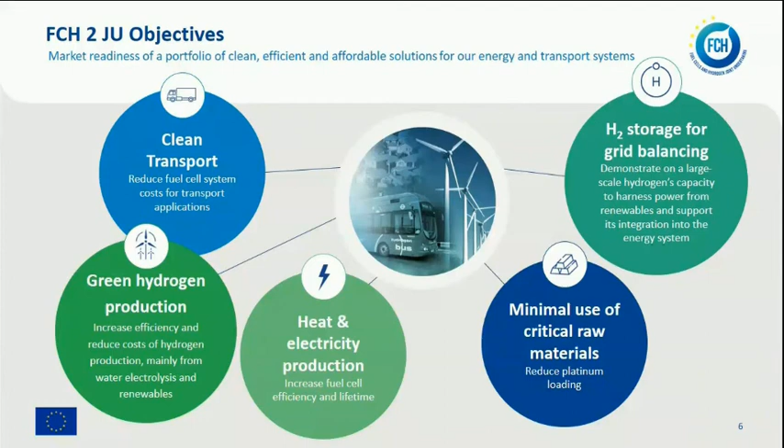Aligned with the 5 objectives, we have our program structure. And when we talk again energy, remember the 3 objectives. We work on our projects on hydrogen production and distribution, storage for renewable energy integration, and fuel cells for power and combined heat and power generation.

On the transport, we address all road vehicles, cars, buses, trucks. Non-road vehicles and machinery, like materials handling vehicles, for example. Maritime, rail, and aviation applications, more heavy-duty applications, and again, you will see it in the call of this year, but also the related fueling infrastructure, the hydrogen fueling stations with all their components.

And when we talk about cross-cutting, these are issues that we address for both energy and transport applications, like standards, pre-normative research for standards, safety, education, and all the issues that are common to both policies, energy and transportation.

So far, I mentioned 13 calls, so we have 11 years of existence and 11 years of implementing calls. And between 2008 and 2019, we have supported already 266 projects for about €1 billion public funding. And then you can see down, it was covered somehow by the articles, we have at least the same amount of private funding in projects. So these are in the projects.

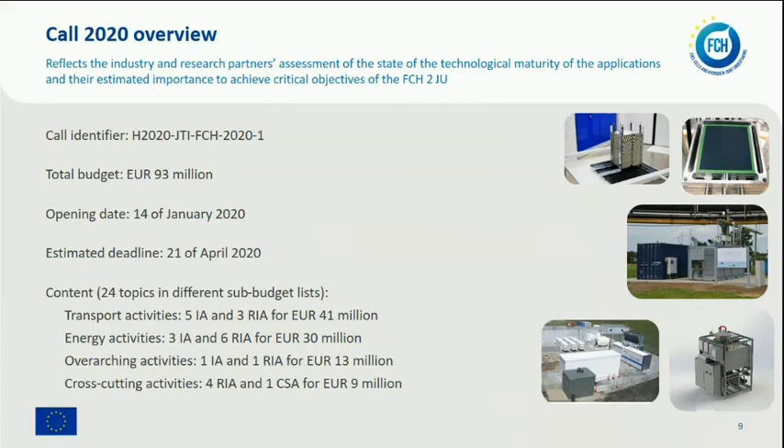I'm not going to talk much about Mission Innovation, just to mention that it was launched in May 2018. Innovation Challenge 8, hydrogen, is the challenge that is important to us, and the member countries in that challenge are encouraged to participate in our call.

Now, practicalities. You should have already the agenda. The agenda was on our website. We will go through the call topic presentation. Some of the topics will go through the call topics presentation. We are not going to read out our work program. So we will underline important things in every single topic. Please put questions if you have.

I'm going to get in a moment to the call. We will have a networking coffee. Please use this break for coffee, for lunch, and even in the afternoon to talk to each other, form consortia, and in order to submit successful proposals to us.

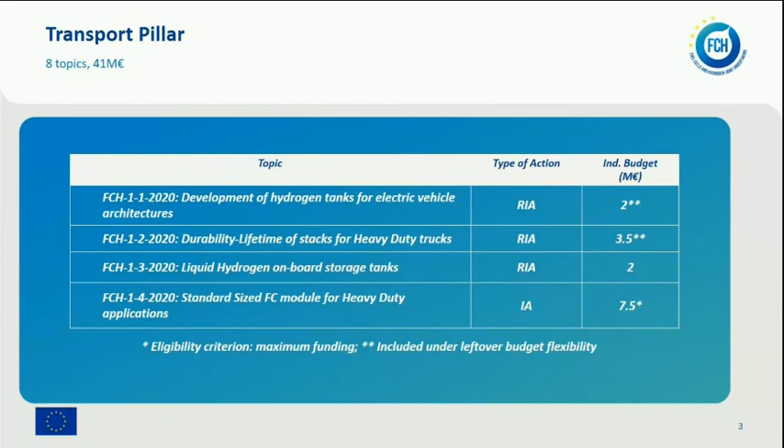The first topic is on hydrogen tanks for electric vehicle architecture that have a low TRL, and I'll show you very briefly. The second one is durability of stacks, again, kind of a low TRL type of topic, for advanced units for heavy-duty applications. Then we have liquid hydrogen for onboard storage, and we have standardized fuel cell modules for heavy-duty applications. Very challenging but very interesting topic as well.

The next four are demonstration of coach buses. This one is one of the big ones, probably in Europe. Demonstration of liquid hydrogen for the waterborne sector. So this is basically marrying, if you like, the heavy-duty application of maritime ships and liquid hydrogen in one topic alone in Europe. So that's a big one as well.

Then we have a topic that's a little bit broad for train applications. There are a number of different applications that you could actually look at in terms of the railway sector. And that's a big one, 10 million euros overall. And the last one is scale-up and demonstration of innovative compression technology. So that's, let's say, moving up to scale in terms of TRL for new compressor technology.

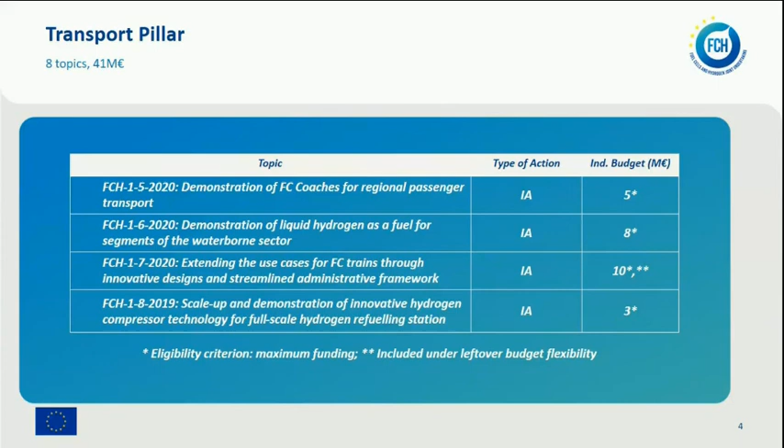So without further ado, I'm going to try to summarize very briefly the main lines of each one of these topics. So the first one I mentioned is development of hydrogen tanks for electric vehicle architectures. And the idea here is that the vehicles don't really match the cylinder shape that we have today, and we need to go to conformable shapes, more prismatic type things, that will really conform much better to standard vehicle architectures. Okay? So that's the main thing.

This is, of course, a low TRL. There's a lot of work that needs to be done, not just the materials, but really even beyond that. And you have some requirements in terms of the design space that you need to fit into, how many prototypes need to be built, and there's a fair amount of testing listed on the topic that you need to go through for any one of these prototypes. So that's something that you need to pay attention to. And I would also underline this is a Mission Innovation labeled topic. So please look into possibilities to collaborate with such countries.

The next topic is durability and lifetime of stacks for heavy-duty applications. And the idea here is to see if you can come up with a set of stacks and/or cells and MEAs, and truly determine what the degradation mechanisms are, and improve the MEA and cell design based on those findings, particularly for heavy-duty applications, more specifically for heavy-duty trucks.

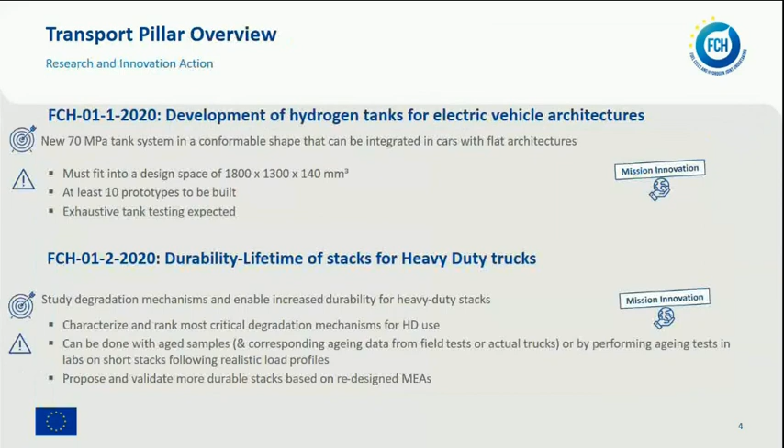The next topic is liquid hydrogen for onboard storage. And here the idea is to go to liquid hydrogen for onboard storage for heavy-duty vehicles. So this is not necessarily light-duty vehicles, which was something that was done in the past, and you may remember some work done 10, 15 years ago by a number of companies. This is really going in the next direction for larger storage requirements for heavy-duty vehicles.

It needs to be compatible with existing liquid hydrogen refueling technology, and the feasibility should be evaluated through a design study and demonstration test bench. So that's something that you also need to look at. You have there some targets in terms of the capacity. So these are larger tanks, 40 to 100 kilos. So this is not for your standard light-duty vehicle, your car, or anything like this. This is really trucks, or even larger, trains, ships, and so on. And with some targets also in terms of the boil-off rate and the refueling rates.

So that's an interesting topic. The next one is standardized fuel cell module for heavy-duty applications. This is a very interesting and challenging topic at the same time. The idea here is to develop and validate a standard fuel cell module for heavy-duty applications. The first 12 months should define the standard module frame, size, inputs and outputs, connections, and so on and so forth, by a minimum of 7 fuel cell suppliers and 3 vehicle OEMs.

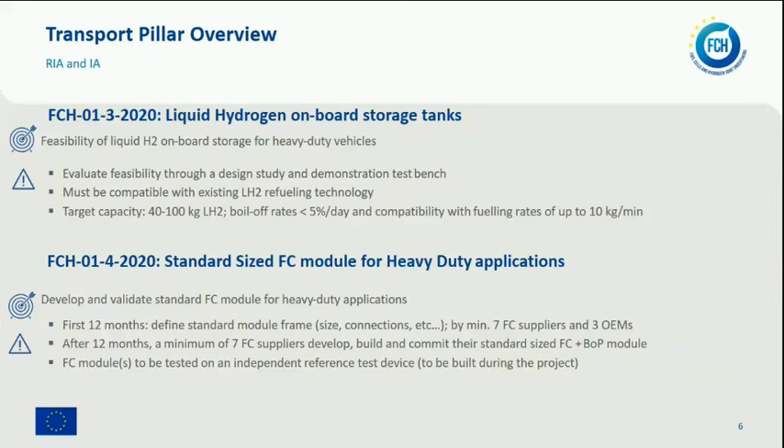Today's topic is demonstration of fuel cell coach buses. This has been requested by the industry increasingly over the last couple of years or so. These buses need to be designed and built; a minimum of 6 of them should be built and demonstrated within the scope of the project in 2 coach segments, both intercity and long distance. They must be operated a minimum of 2 years and 80,000 kilometers per coach per year, with a minimum daily travel distance of 100 kilometers. So this is the first time this is done. We hope to see a lot of interest on this one.

And then the next topic is demonstration of liquid hydrogen as fuel for the waterborne sector. And again, you can imagine that ships, especially larger ships, require storage technologies that go a little bit beyond standard compressed technology, and there liquid hydrogen starts to become a more attractive solution. So this liquid hydrogen storage module needs to be developed with a minimum of 1.5 tons of capacity, and of course integrated into the ship with a minimum of 2 megawatts of power.

Bunkering and scalability up to 20 megawatts also needs to be addressed in this topic, and this should be operated. So it's not just a design, they need to be integrated and operated for a minimum of 12 months, including both winter and summer seasons, with a minimum of 3,000 operational hours.

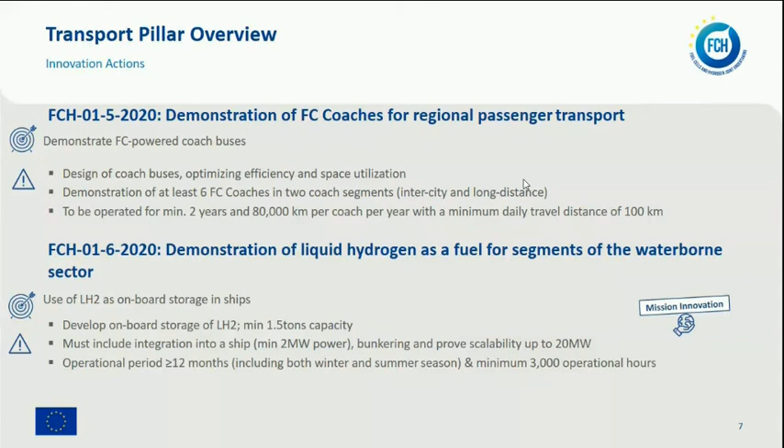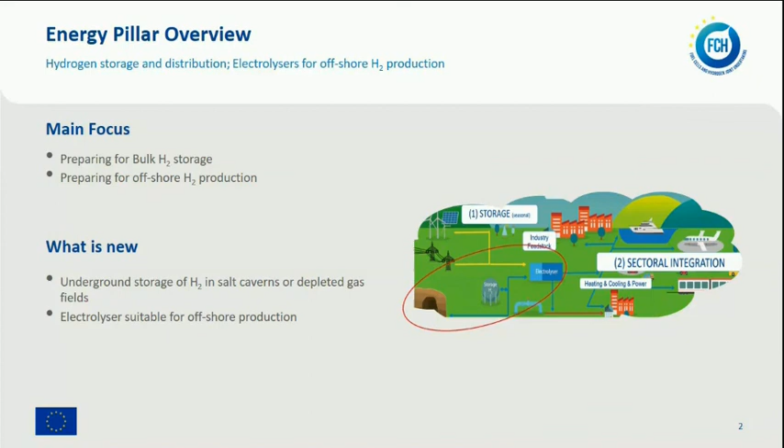Four topics. 2.1 is for hydrogen distribution: liquid organic hydrogen carriers, a low TRL, 2 to 4 TRL topic. 2.5 is the underground storage of renewable hydrogen in depleted gas fields and other geological storage, oil fields. It's a study. 2.6 is the electrolyzer for offshore production of renewable hydrogen. These are all research projects. And the last topic, 2.7, is the cycle testing of renewable hydrogen in a salt cavern, a small salt cavern.

It's a demonstration project. Here topics 2.5, 2.6 and 2.7 have this limitation on maximum funding, and two topics, 2.5 and 2.6, are included under leftover budget flexibility, meaning they would be preferred in case there is additional budget left. These would be preferred topics to select more than one proposal. So, briefly through the topics.

2.1 is catalyst development for improved economic viability of liquid organic hydrogen carriers, decreasing PGM loading. It's open to all concepts, provided the carrier addresses the efficiency, regulatory and safety issues. And what is important for me to clarify, as it is not very clear in the topic text: the capacity of the rig to be demonstrated is mentioned as 10 kilowatts. This refers to the dehydrogenator power. It's roughly a system processing 1 kilogram of hydrogen per hour. These systems now consume around 10 kilowatt hours per kilogram of hydrogen released. The aim is to take this down to 6 kilowatt hours per kilogram.

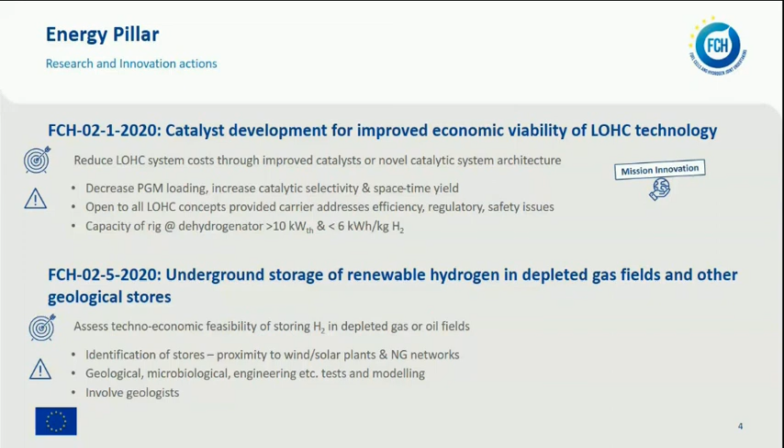2.6, the research is the electrolyzer module for offshore production of renewable hydrogen. It will be a 1 megawatt plus electrolyzer compatible with an offshore environment. To save some time, we didn't dictate that it goes offshore. It should be near shore and use all the funding to improve the electrolyzer. It should be one module of the multi-module design that at the end of the project should be certified for offshore operation. The offshore operation should be fully simulated.

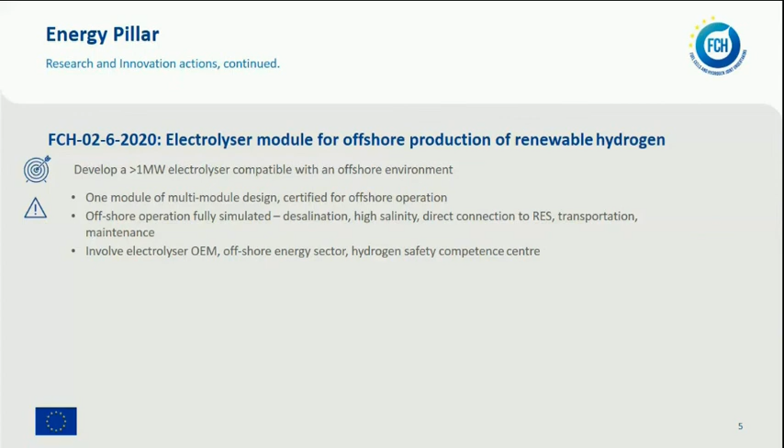So the desalination unit for feeding the electrolyzer should be there, and the system should be ready to work in a high salinity environment, direct connection to renewables, hydrogen delivery at suitable pressures, and ease of transportation and maintenance of this module to an offshore platform. It should involve an electrolyzer OEM, an offshore energy sector company, and the Hydrogen Safety Competence Center to be able to reach all these targets. The innovation action here is the cycle testing of renewable hydrogen storage in a small salt cavern.

Now, again, it's a megawatt scale electrolyzer to be coupled with an existing or to be drilled small salt cavern. And the capacity of the salt cavern should be small enough to allow daily cycling of the cavern. So it shouldn't be something very big, because a megawatt scale electrolyzer won't be able to produce enough hydrogen over a day to allow the cycling.

That will eventually allow, again, the technical assessment of geological, microbiological, etc. capabilities of salt caverns. Issues like the purity of hydrogen, injection and extraction should be addressed, in view of scaling up eventually to large capacities.

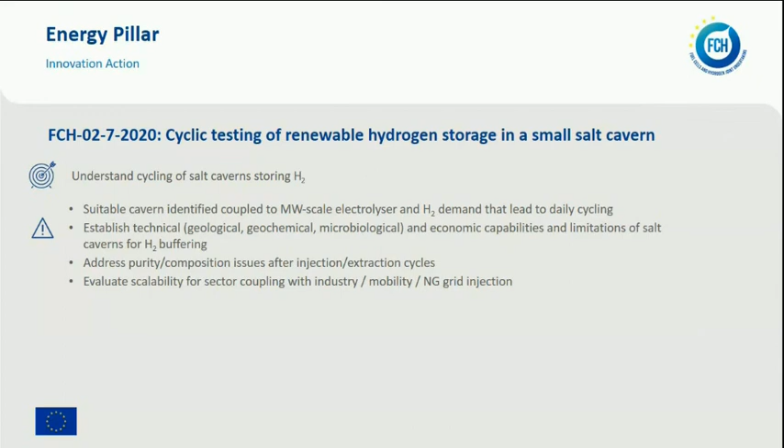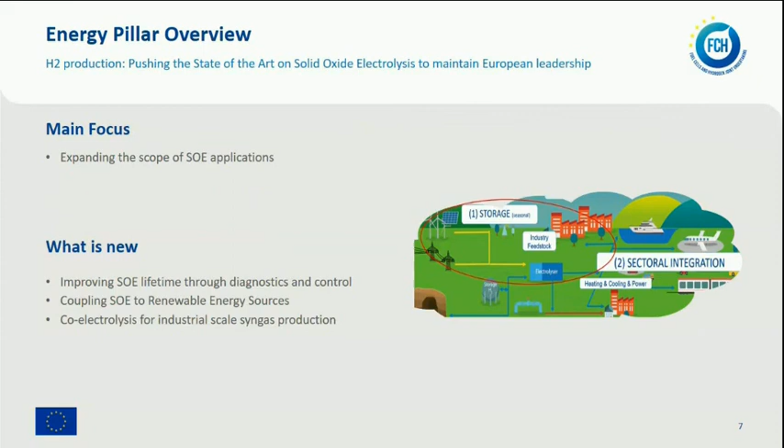The next subgroup, which is actually covered by my colleague Jens, is high temperature electrolyzers, mainly expanding the scope of solid oxide electrolyzer applications by diagnostics and control systems, coupling solid oxide electrolyzers to renewable energy sources, rather challenging things, and co-electrolysis. There are 3 topics. 2.2 is the integration of renewable heat and power, 2.3 diagnostics and control, and 2.8 is a demonstration of large-scale co-electrolysis for industrial power-to-X market.

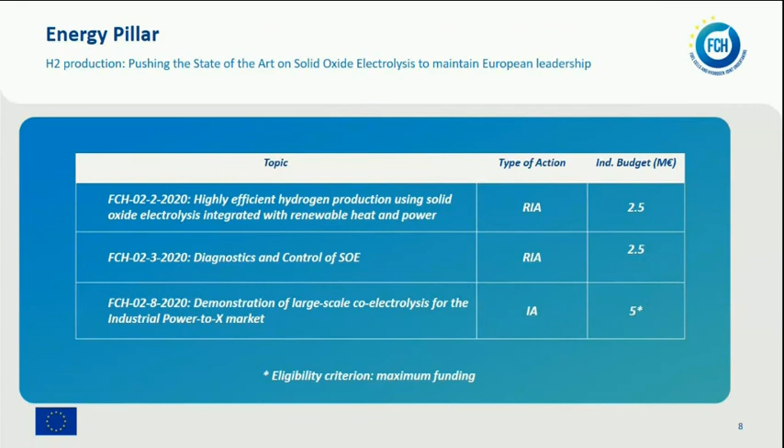2.2 is integration with renewables, the coupling with renewable electricity and heat. It's mostly coupling to solar energy, so PV and concentrated solar heaters. A capacity of 20 kilowatts electric is the aim capacity of the electrolyzer, and the effect of heat and electricity variation over the day. So the challenge here is how to keep the stack hot during the night. And eventually there will be a design study for upscaling to hundreds of megawatts.

Topic 2.3, diagnostics and control for solid oxide electrolyzers, is going to build up on what has been done for solid oxide fuel cells, to understand better degradation mechanisms for solid oxide electrolyzers, reversible solid oxide cells, and co-electrolysis.

Lastly, the demonstration project. We do have demonstration of large-scale solid oxide electrolyzers now at the scale of 3 megawatts equivalent electric. Now the point is to move to megawatts for co-electrolysis, aiming for a system of 700 kilowatts electric, capable of producing at least 80 kilograms of syngas per hour. It should be fully equipped, the CO2 stream should be available, the electricity supply, etc. Demonstrating the system for 2 years, producing 500 to 900 tons of syngas over that period.

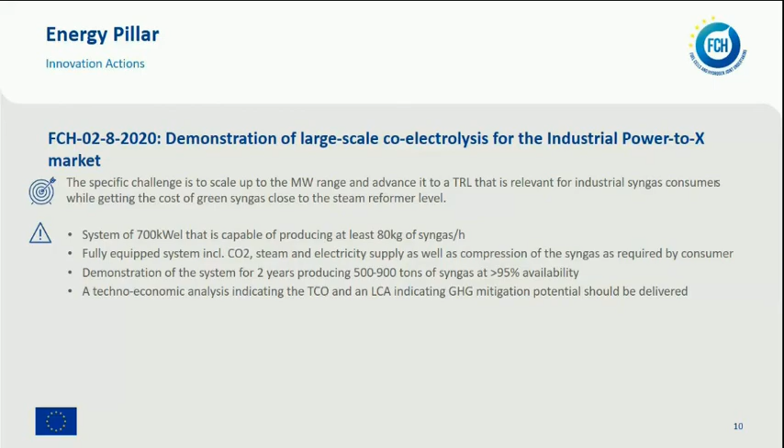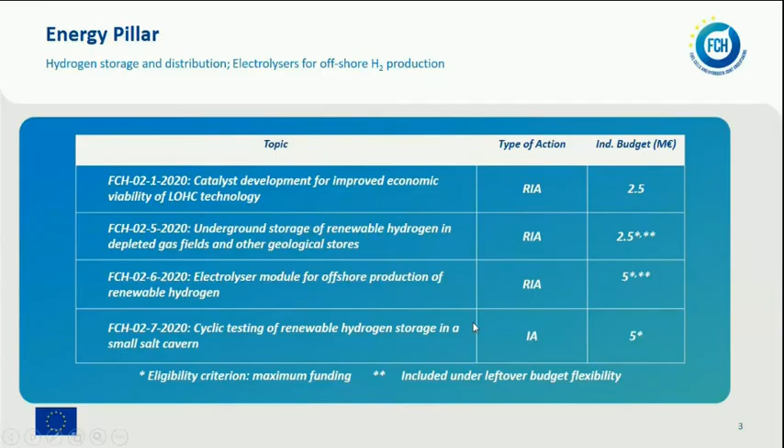Can you go to slide number 12? So, with that I've done with the slide.

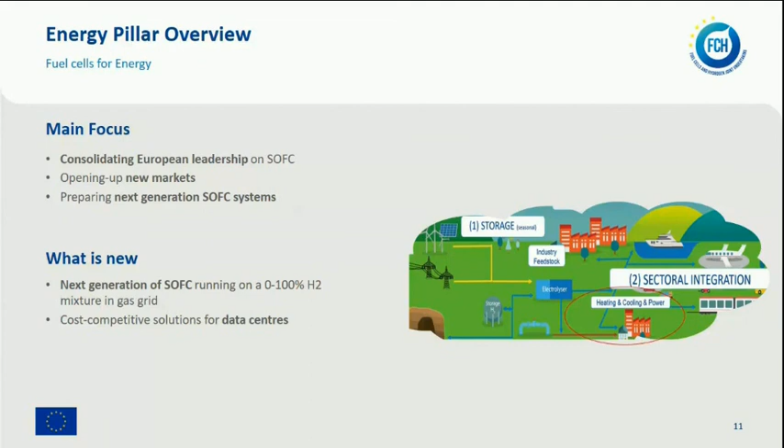So again, here, data centers, innovation action, and next generation of solid oxide fuel cells, all to help our industry to consolidate their position in the market. Two topics, the first one, research and innovation action. The second one on the data center is innovation action, and it has a maximum funding. That's an eligibility criteria, important to take into account.

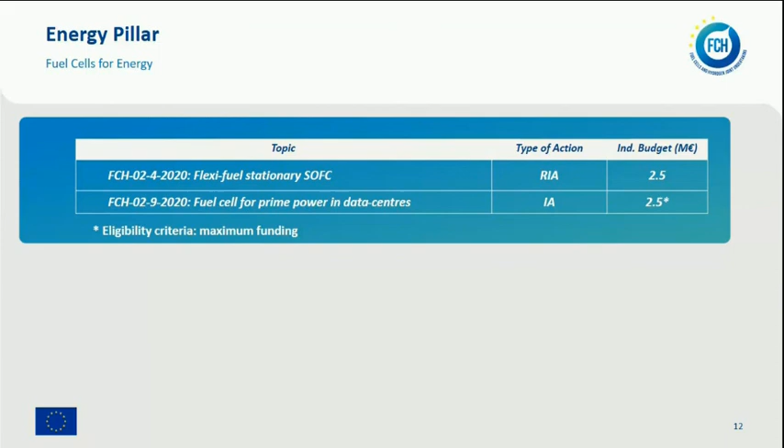A bit more details on the flexible fuel and stationary solid oxide fuel cell. It's about developing and demonstrating in a relevant environment stationary solid oxide fuel cell systems able to operate in a wide range of gas compositions, including hydrogen mixtures. That's why I was saying we really want, as a result of this topic, solid oxide fuel cell systems that are hydrogen ready. We need to look at what we have, so it's really focused on adaptation of existing systems. And two of the manufacturers should be based in the EU or associated countries under Horizon 2020.

We want to use these topics to bring the systems as close as possible to certification, so that the manufacturers have an offer in the market. And it has to be demonstrated in the operation window from 0 to 100% hydrogen. Two main things about the demonstrations. 6,000 hours at the stack level, showing a degradation rate below 1% per 1,000 hours. At system level, we need to see the system running, showing electrical efficiencies of more than 48%, with acceptable availabilities, more than 90%.

There are a number of system performance and CapEx targets, quite demanding, but that's precisely what we need to do on the performances and CapEx today with the units that we have. And they are all in relation to the 2024 multi-annual work program targets. As I said, the topic should lead to systems that are hydrogen ready.

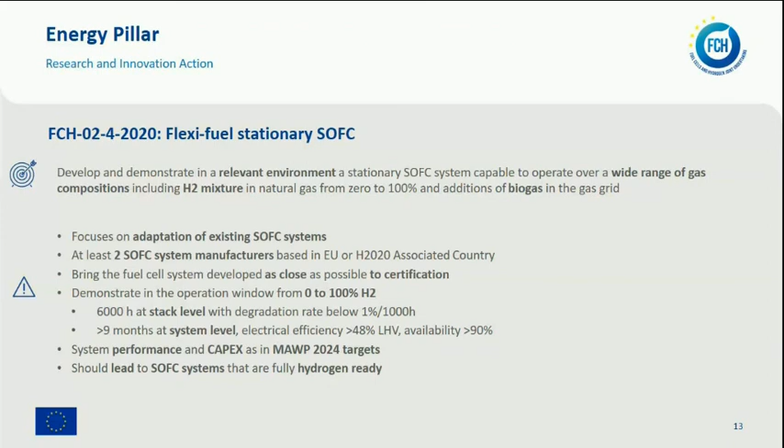On data centers, the challenge is how to provide reliable power supply to data centers in urban areas. Many times we have power cables that are overloaded. And when we go into thinking about, okay, let's do some sort of gas engine capacity, there are more and more air quality restrictions. There is a potential for fuel cells in there. So this topic is aiming to support industry to develop building-integrated solutions, fuel cells, adapted to data centers in urban areas. We're looking at more than 50 kilowatts electrical capacity for the fuel cells.

And we need to really have some solutions that position players in those topics in advance of what we have now available in the market. So it's very important to put together cost-effective concepts and high-performance solutions, and there are specific KPIs that you can find in detail in the topic. And the other thing here is that it's about strengthening the competitiveness of our industry. So the topic has to foster replication.

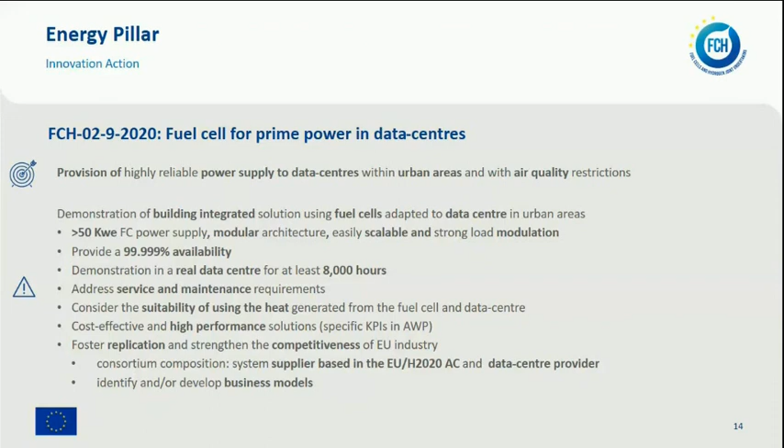Moving to cross-cutting, it's about cross-sectorial energy and transport addressing the same topics. We have a research action, looking at proton-conducting ceramic materials, and another one, an innovation action, flagship projects using hydrogen for decarbonizing islands. High-temperature proton-conducting materials: it's about unlocking the potential of proton-conducting ceramic materials as alternative ways to compress and purify hydrogen, a low TRL action, starting at 2, ending at 4.

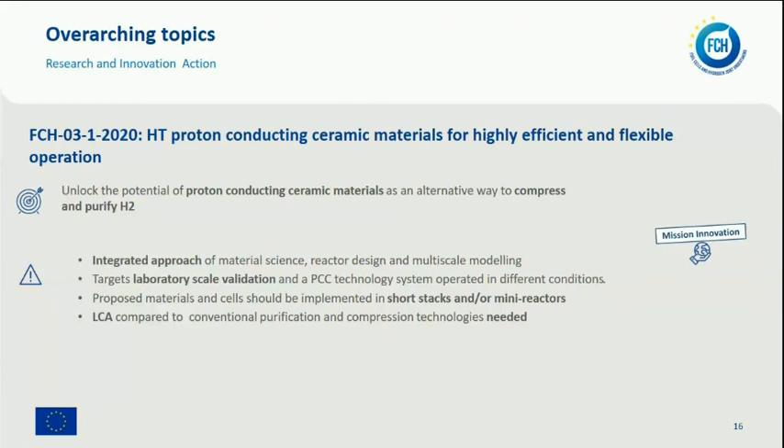An integrated approach is necessary to material science and reactor design. It targets the development, scale-up and validation under different conditions, and there needs to be implementation of the selected materials as short-stacks or mini-reactors. Life cycle analysis is needed in comparison with the conventional technologies.

Final topic I'm going to present, as I mentioned, a flagship project, 10 million euro maximum funding. It's about showcasing the ability of hydrogen to decarbonize islands in Europe. It's about demonstrating how hydrogen can enable sector coupling and maximize the amount of renewables that can be integrated in the selected island. All hydrogen has to be produced using renewables in the island, an important element.

At least 2 fuel cell and hydrogen applications covering energy and transport, where we have stationary fuel cells for heat and power to cover energy, and then to have some buses. At least 300 tons of hydrogen per year, produced in the island, using renewables in the island, but consumed also in the island. Key is the replicability and scalability of the project. Very important to configure revenues that are affecting that.

And of course, we set a maximum contribution, but the project has to identify and secure additional funding. It has to be a flagship project in a visible location, so it's up to the proposers to convince that this is the case. So any additional funding that is necessary needs to be covered by offering a financing scheme. And finally, it's all about the long-term vision for that island or territory. It's about how hydrogen can play a role in the local and regional plans, and it's important that that is also included and addressed in the proposals.

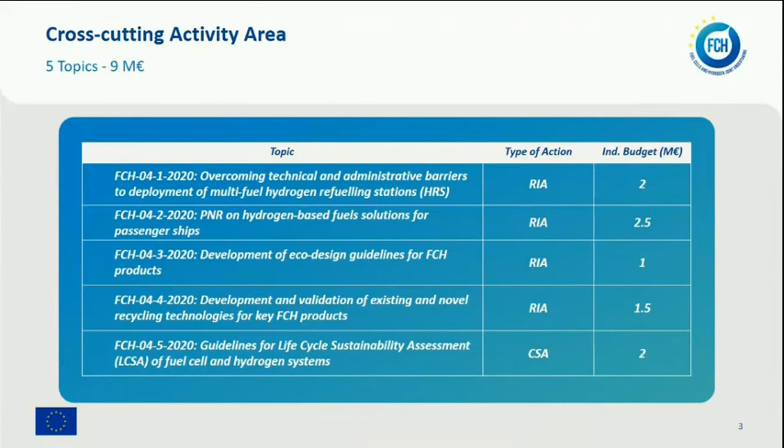Cross-cutting this year we have 5 topics accounting for 9 million, and we cover research and innovation actions, but also support and coordination actions. The first topic, as I mentioned, is exactly refueling stations. We would like to provide guidance to assist the hydrogen dispensing in this multi-fuel environment, in these refueling stations. The work scope includes at least 4 activities, and the project should start with desk research on the current status in the European Union concerning these refueling stations for light, but also heavy-duty road vehicles.

They also should entail an experimental campaign of practical research to address the gaps identified in the desk research. They have to generate best practice guidance that can be applied throughout the entire Union, because what we'd like to have at the end is a common approach. And finally, they have to engage with permitting authorities and standards developing organizations, because we want to share all this knowledge with the relevant stakeholders.

This is a clear impact-focused topic. For every one of these activities, there is a clear impact in the impact section. Please have a look. All in all, the overarching activities are focused on trying to get a higher degree of harmonization of requirements for the permitting of the technologies. This is a topic with a strong international dimension. We encourage you to seek international cooperation, in particular with Mission Innovation.

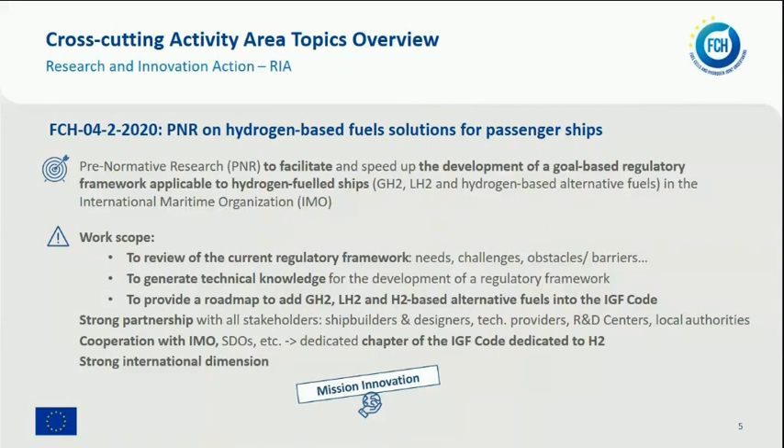We believe that cooperation with IMO is needed, because at the end what we want is a chapter in the IGF code dedicated to hydrogen. And as in the previous topic, we encourage a strong international dimension, because at the end this is equal for everyone. The third topic is concerning eco-design guidelines.

We would like to really incorporate the environmental dimension right from the design of every FCH product. At least 2 FCH products should be covered, from fuel cells, PEM cells, water electrolyzers, solid oxide cells, or even alkaline water electrolyzers. We would like that the guidelines include a set of prioritized eco-design actions, in which the emphasis should be on design for recycling. But also, they should look into frameworks for more mature sectors, such as batteries.

The project should take into account the European Union taxonomy framework, and the methodology of the eco-design assessment should include the impact assessment of the solutions proposed, showing the benefits for all actors along the life cycle of the product. Clear cross-collaboration with the topic on life cycle sustainability assessment, which is the last one I will present in a minute. And as eco-design is important for everyone, a strong international dimension is required.

Next is about recycling. Yes, we would like to develop and validate existing and novel recycling technologies for FCH products. The work should review, rank and identify all the physical, chemical, and thermal processes for material recovery.